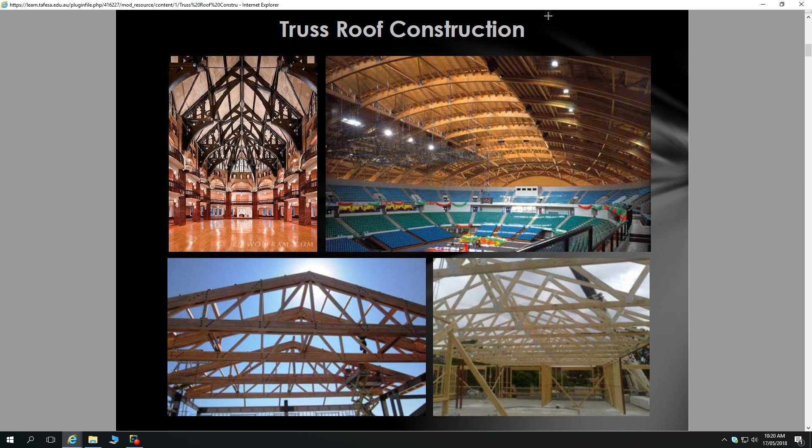Just a quick run through. With the evolution of timber framing, it starts out using simple timber members to span a distance. And timber has its limitations - the timber we can buy from the supplier can only be 6 metres long. That's the cut-off point for timber manufacturers, dictated partly by the size of trees and what can easily be handled. But even if we select trees ourselves and chop them down, there are still limitations in those sizes. One way we get by those limitations is by employing conventional timber pitched roof framing methods, and also by producing trusses.

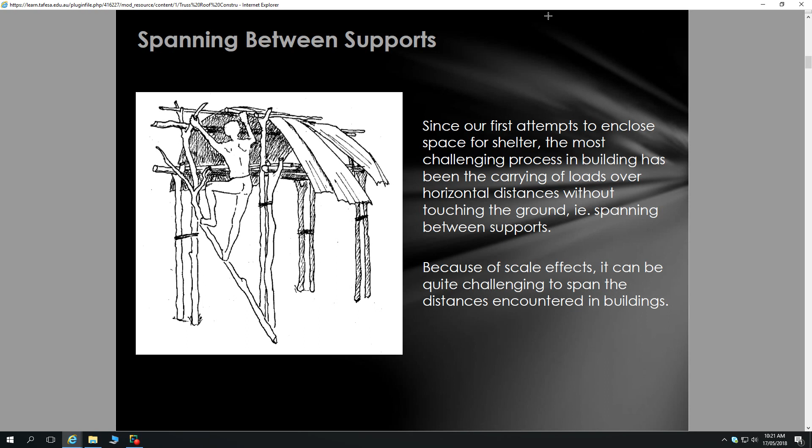So a very traditional approach is to use that skillion roof, and this is something which is still - what is old is new again - that process, or that aesthetic, of having skillion roofs.

Does anybody know Troppo Architects? A couple of nods, yeah. I guess they're known for their skillion roofs. They were a pair of architects that started up in Darwin and did a bunch of projects there, then opened an office back here in Adelaide about 10 years ago, bringing down some of those ideas from Darwin - really lightweight framing or lightweight appearance of buildings with skillion roofs, and also something called twisty roofs, which is basically a skillion roof with a twist in it.

That's just rafters that are graduated on a slope, and then the steel sheeting in front of that. This skillion type roof is one of the simplest forms of roofs we can do.

We have very simple elements: our rafters and then our purlins on top of our rafters, spanning from point of support to point of support. That has its limitations using natural timber, in that we can only get certain lengths of natural timber. If we have a log, probably this bit of revision from last week, we can only get one really big piece of timber out of our log. The rest of the log has to be smaller bits of timber. So we're restricted to getting those really large bits of timber that will span from one point to another point.

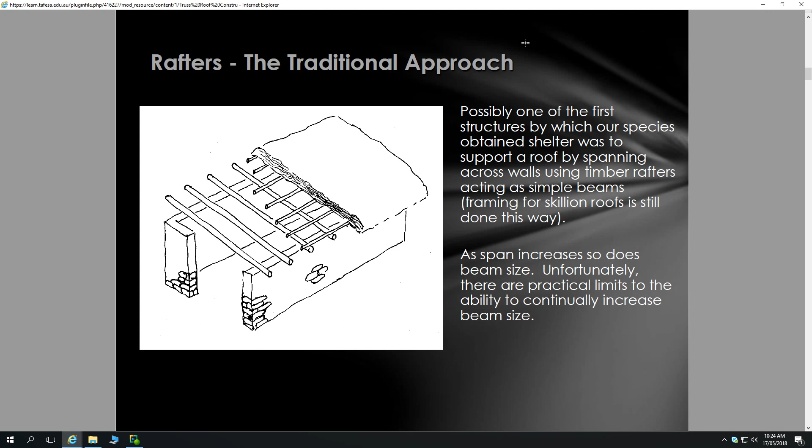Back to our trussed roofs. They're designed to span between external walls, factory made, and have to be installed in accordance with the Australian standard 4440. That standard sets out predominantly how an installer of the trusses has to go about putting them up. The reason we need to know that standard as designers is that it also gives some limitations as to what we can do, and also sets out the types of things we need to be looking for on site. We won't get too heavily into that today, but I suggest you look at it in your own time - Australian Standard 4440.

Trusses can be designed for most roof shapes, but are preferred for simple designs, rectangular with gable ends. I think everybody here knows what a gable end is as opposed to a hip end now. Gable end means we'll have that triangular shape right at the end of our roof, so if we were to produce a rectangular building with a triangular shape at the end.

That is incredibly simple for trusses. We have all the same trusses all the way through, except for the last two on either end, which are slightly shorter than the others, and we have outriggers which go underneath our purlins that go out to form that gable end. I think we've got a mock-up of a building in there I can bring in to show you how that gable end is formed.

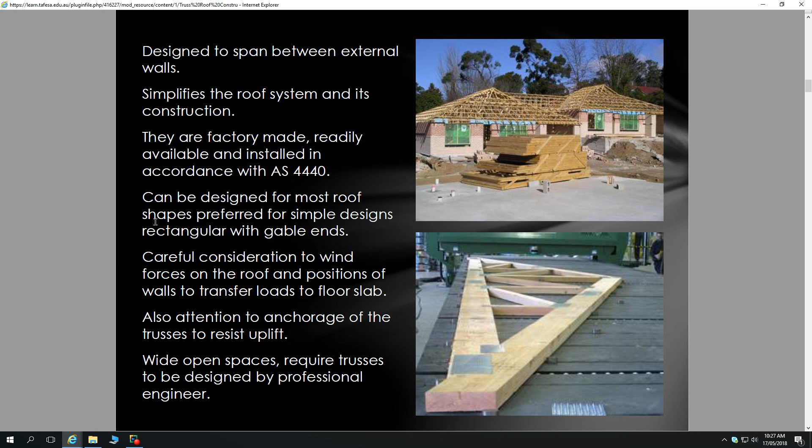Incredibly quick and simple form of construction. Gets a little bit more difficult when it comes to hip ends. I'll get into hip ends a little bit later.

As I said before, very lightweight construction, large clear spans, open web construction makes for easy installation of services. With our conventionally pitched roof here, we have a lot going on. Yes, there's plenty of open spaces there, and for running air conditioning ducts, etc., we'll find ways to get those in there, but there is a lot going on.

The thing about our timber trusses is we have very large open spaces, and those open spaces are all going to be in line with each other because the trusses are going to be all the same, except for when we get to our hip ends. That makes it incredibly easy for designing services. We can go, all right, we're going to put an air conditioner here on the roof, and then run our duct all the way along. Makes it incredibly simple. A conventionally pitched timber roof is not as simple for that, we have to do a bit more working around. So incredibly quick to put up, there's that versatility of design.

Can someone design a truss to have an attic inside it? Pretty much, no, but you can design trusses with large enough open sections. For example, if we wanted an attic in a truss roof, we could do a form of truss like this, and we'd probably have to do some webbing in there as well, straight up to there. So we'd have to form up trusses that are like this. I'm not a truss manufacturer myself, but that's what we would have to do to get an attic in there.

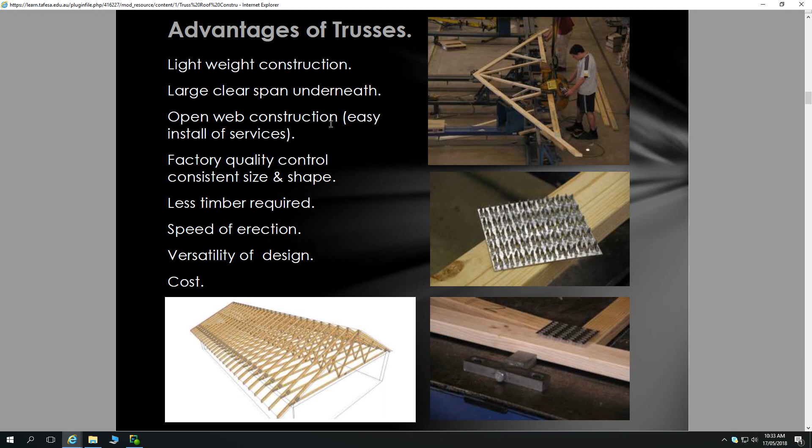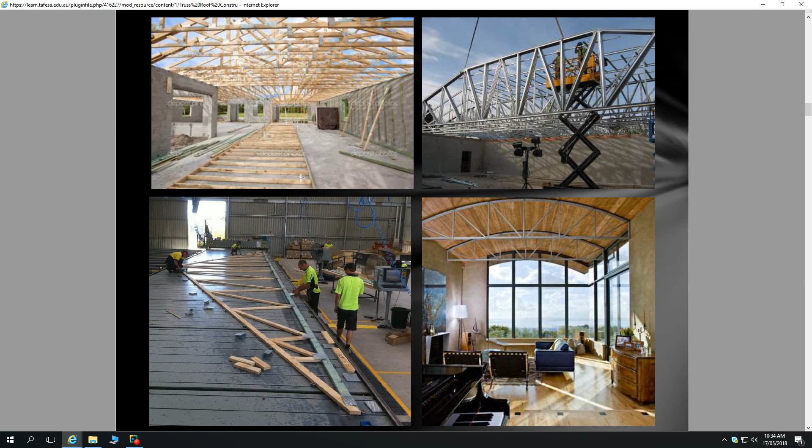So a whole bunch of different types of trusses. Anybody want to have a guess at how long that truss is? I don't know myself, but I can guess - more than 15 meters? It's probably not going to be more than 15 metres. I reckon 15 metres is about our cut-off for being able to be transported on a semi-trailer.

I guess if somebody was laying down on that bed, that'd be about 1.8 long each of those sections - we've got 1, 2, 3, 4, 5. Can't count them, but it would be probably about 13, 14 metres long, that truss.

That is a very large open space to create, and that's the fantastic thing about trusses - they're just using pieces of 90 by 35 timber, so not very large pieces of timber. Look at our timber log, we get lots of 90 by 35s out of that log. So plenty of that timber available, but we can create very large spaces using those trusses.

Other interesting things shown in these pictures. This one at the top, it's not that clear and evident, but there's something interesting happening with our bottom chords - those trusses have a stepped bottom chord to create a two-staged bulkhead. Now, why the designer or the architect has decided on a two-staged bulkhead, I don't know, but that goes to show that such a feature is also possible with trusses. You can certainly achieve that with conventionally pitched timber framing as well, just not as simple and not integrated into that one unit.

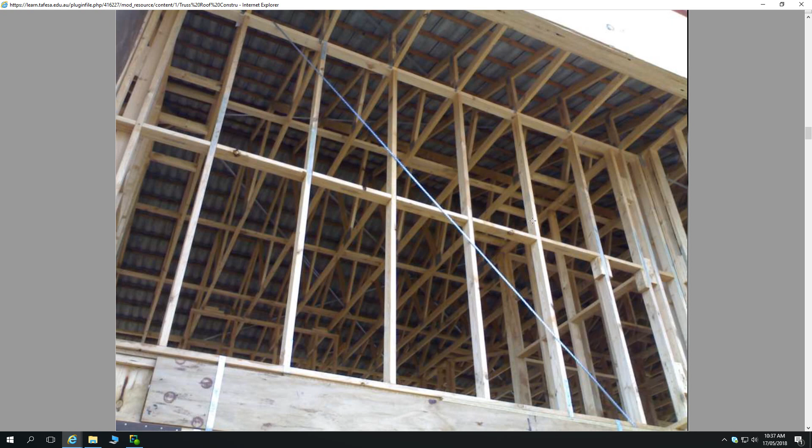There we have some trusses that are called cantilever trusses. So what we can see right at the top of this picture is that the trusses, their ends don't mount on the timber frame - they're actually mounting partway through the truss, let's say 900 millimeters into the truss. And to achieve that cantilever, those trusses have been designed with a vertical web straight up from that to transfer those compression loads from the roof straight through that web onto that wall frame.

So we have this end section of the truss working in its own system - we've basically got a triangle there to be able to cantilever out and take all the load of those tiles. Triangles, very strong shape. We've got that triangle there, and then our truss back through there that's also working all as a single unit.

So cantilever truss, that differs from a sailover truss. A sailover truss is where we've got our top chord that hits our top plate of our wall framing and then sails over to create a raked eave. So our cantilever truss creates what's called a boxed eave, this one creates a raked eave. However, we can go along and add some timbers into here to box the eave if we wish.

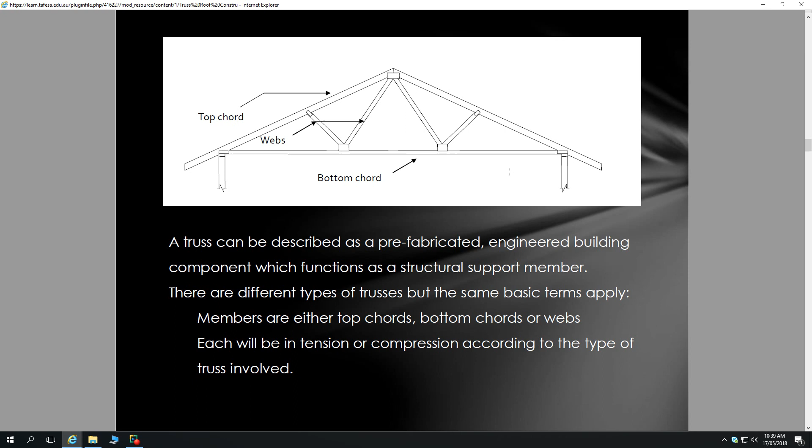So a bit of truss terminology - top chord, which are our rafter sections, bottom chord, which make up our ceiling joist sections, and webs that tie those two together to make them work together as a system. We'll go through that fairly quickly, we do have a lot to cover, so here we go. Now, I said I'd talk about hip ends.

So with trusses, if you understand our standard truss, our typical A-type truss with a W-shaped web, and understand how we form up a hip end with trusses, and then understand what's called saddle trusses - if we know all of those, we can look at probably 98% of trussed roofs and know how every single member within that trussed roof works. That's what we're going to try to achieve now, is to understand hip ends, and then I'll show you some saddle trusses. Understanding that, you can look at far more complex roofs but break them down into these simple elements.

So with our hip end, that's what we've got here on our example roof. Rather than a gable end, which has triangles with the ridge carried all the way out, we've got hip ends, which are sloping ends to it. Very standard form of roof. As you're driving home, have a look and see what roofs are hip ends, what are gable ends, and you'll also see some roofs with Dutch gables as well - that's where you've got a ridge which carries out part way, and you've got a small triangle at the top.

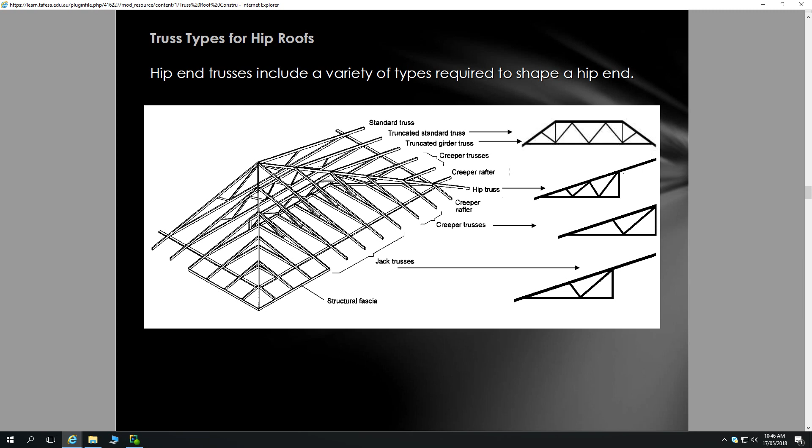So we'll go through this fairly quickly. Explore this to the extent of your own interest, basically.

King post trusses, you'll see those in some very old buildings about the place, old warehouses and things like that, where we have really big pieces of timber back in the days when people were chopping down really big trees, and there was plenty of big timber around. Queen post truss is a little more economical with use of timber because we start introducing more webs.

These king post trusses can only span up to around 5 metres or so. Queen post do up to about 6 metres.

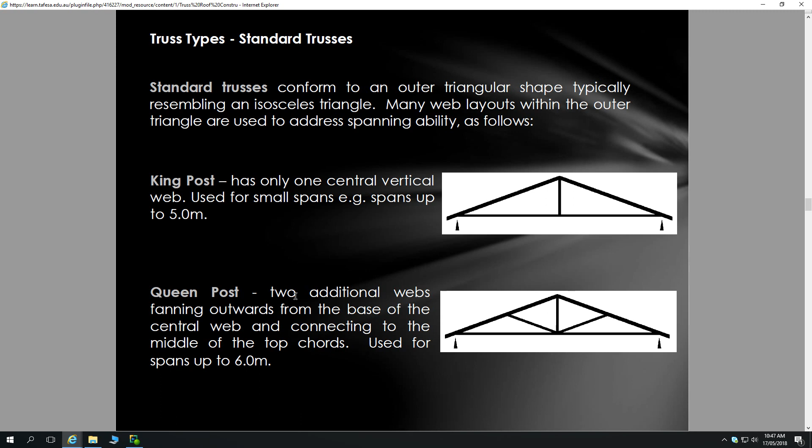So the A-type truss, that's got your W for the web. That's your most common, and they're the ones you'll see in the vast majority of residential builds, spanning up to about 9 metres. So typically we're not interested in spans longer than that in a lot of residential architecture.

However, if we're creating some very large open spaces, we can go to things like our B-type trusses, which have 2 Ws - W on this side, W on that side for our web. So A-type's got the 1 W in there, B-type is W and W. They'll span up to about 14 metres.

So a standard girder can be based on any of these previous types, but is designed to be stronger to support other trusses. We pretty much stop at that generally for residential architecture, for two reasons. People don't tend to build houses with spaces larger than 14 metres in an open section, or a house typically doesn't exceed 14 metres in width.

As a rule of thumb, a lot of councils will allow, when you go carving up allotments, 13 metres frontage to the road. So 13 metre width of blocks, which is fairly typical residential block size now. Older blocks are much larger than that, but 13 metres width. So when we're talking about 14 metre spans of trusses, we're talking about fairly large buildings.

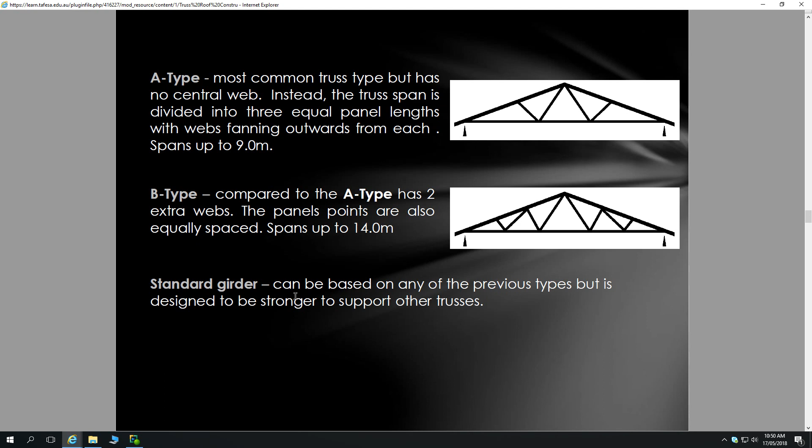And also with very large trusses, you have to think about how you're going to manoeuvre that on site, how it gets about from the truck to the building. So truncated standard truss, and then truncated girder truss - the difference here is this line is thicker, so thicker bits of timber, that's it.

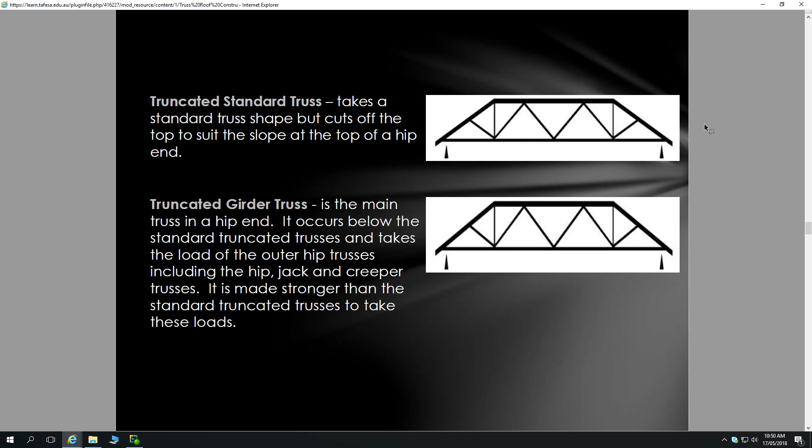Cantilever truss, that's what we saw in that other picture where our truss cantilevers out. A cut-off truss we might use where we've got a parapet wall happening at the front - a pitched roof, then a parapet wall right up front, for a shop front or something like that. Or we might use that in a maisonette example, where we've got two houses joined together by a common wall, or a garage wall. Typically where that terminates against some sort of wall, we'd use a cut-off truss.

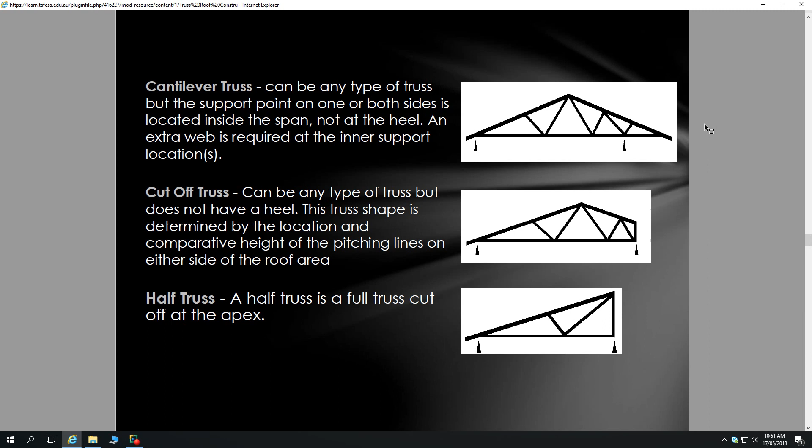And then half trusses - use those in a skillion roof, and use those half trusses in a hip end to form jack trusses, etc. So half trusses are used all through the place, in many scenarios.

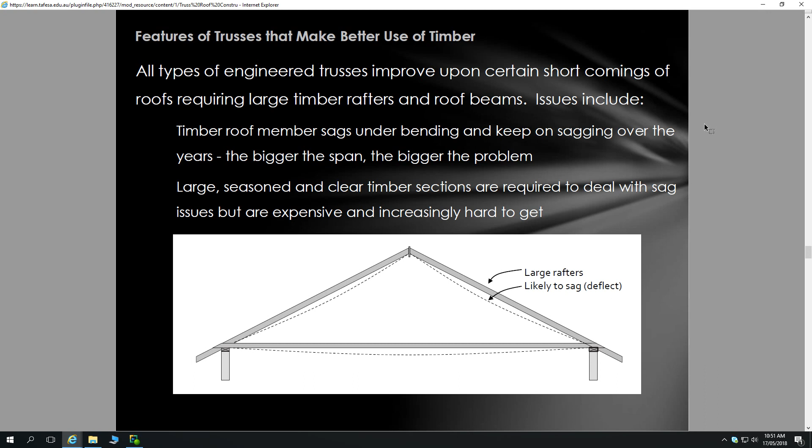So we'll go through this fairly quickly as well, because I think I summarised that fairly well with our truss at the beginning. So timbers want to sag.

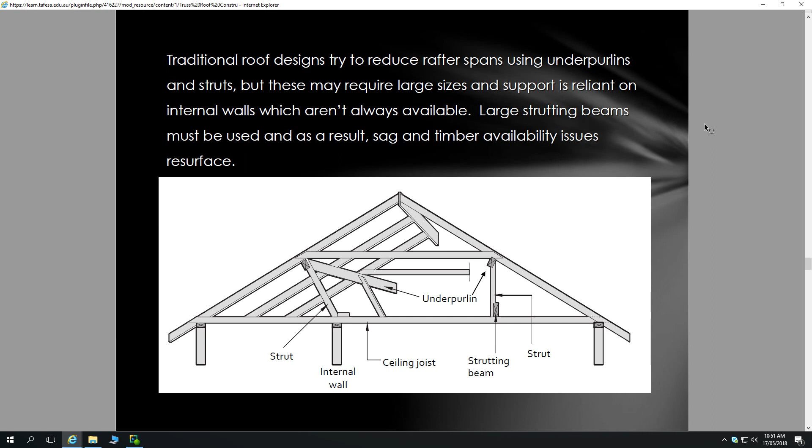So these slides are also organised around showing some of the conventional pitch timber framing in there as well. I'll cruise through that because we're going to cover that a little bit later.

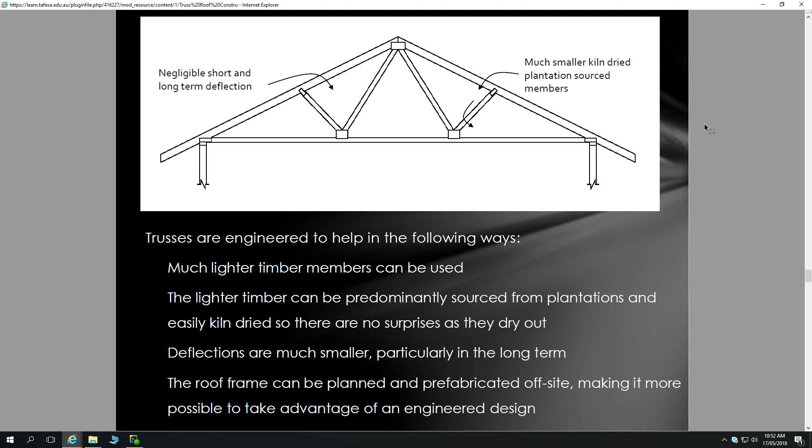Our webs transfer those stresses through other parts of the truss to make it all work together. Trusses can be designed with a slight upward camber. That means when we apply the construction weight to the building, it settles down to be nice and straight. That's preferable to designing a truss which is exactly straight, and then applying tiles, which are 90 kilograms per square metre, onto that roof and causing it to settle slightly with slight curves in it.

So is that the only instance where you do it, when you're doing tiling? Because surely with a sheet roof you don't get that settlement. Yeah, sheet roof without ceiling loads imposed, we're talking about 10 kilograms per square metre on those top chords, that's next to nothing. You're not going to get a piece of 90 by 45 bendy with that. So it's really only with tile roofs that you want it.

That's part of the information you have to supply to your truss manufacturer. You give them your floor plans, your roof outline, your elevations so they can see what those trusses will be in elevation, and you specify the roof type. For two reasons: one is that load, so they can design to counteract it, and the other is for wind loads.

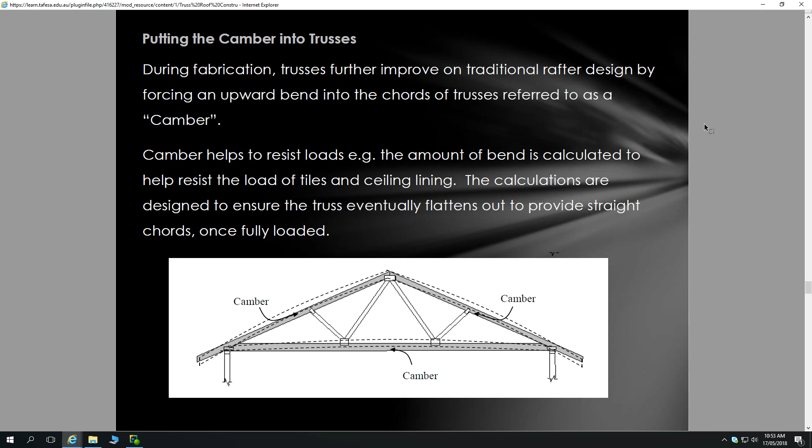Benefit trusses span long distances, as I covered earlier. Internal walls cause problems if used for support, because they change the way the truss works. The way we get around this is we want our internal walls fixed at the slab, but then also fixed at the top, because we don't want walls that just flap around and possibly fall over. So they need to be fixed to our trusses, but we need the trusses to work independently. We're only talking about very slight amounts of movement, millimetres if that, but they still need those millimetres to work.

The way we do that, I'll turn one of my nail plates into an L-shaped fixing. In our L-shaped fixings we have accommodations for nails which are long and skinny, so elongated holes, and the nail goes in there, but it's not shot fired, we don't use the nail gun for that, or we shouldn't. You just hammer it in and leave a small gap. That L plate goes through the bottom chord of our truss, and this is the top of our wall frame here, fixed there like that. So that truss can move up and down ever so slightly, but that wall is still fixed in place, so it can't topple over in either direction. That's how we achieve it.

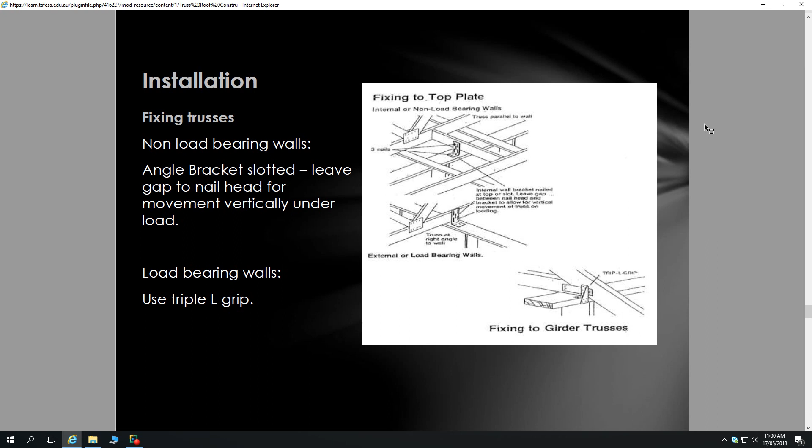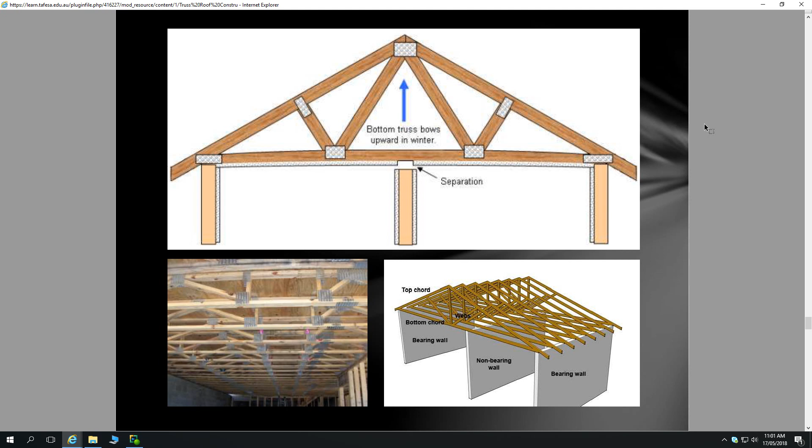So we've got our roof trusses. We also have trusses for floors as well. To be able to get floors in an upper story to span large distances, create those kitchen and family areas that are 12 by 12, that's how we do that with floor trusses. So more for your own interest, a whole series of trusses here.

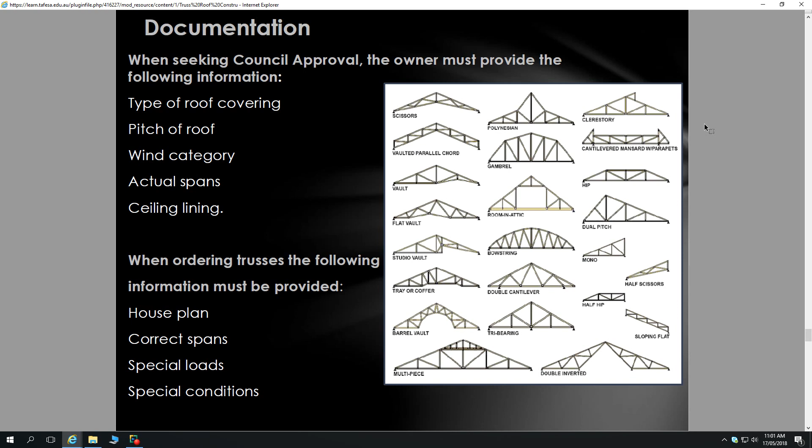And this is our standard gable end, so just a whole series of triangles through. Although what we don't have happening in this example, unfortunately, are those outriggers that I spoke about. Someone's done just a very simplified version of that.

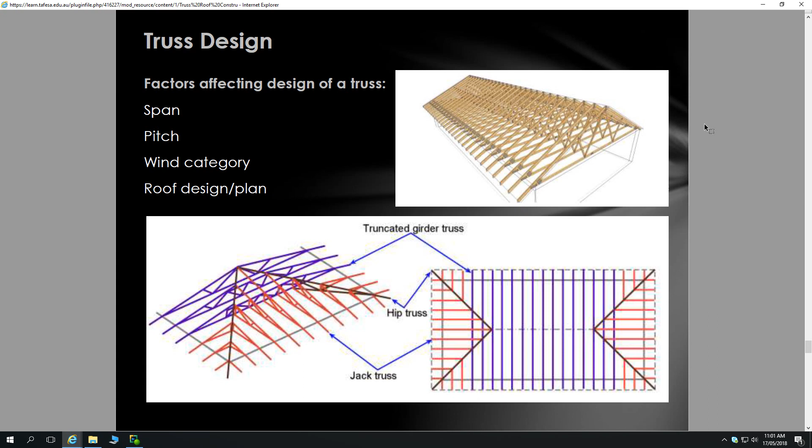And then our girder truss layout. Once again, something that looks a little bit complex, but is actually really very simple when we break it down into what we know now about hip ends and standard trusses. So there's a whole series of standard trusses in here, it's a bunch of hips, etc.

What we are yet to cover are what are called saddle trusses. Saddle trusses are these tiny little trusses that mount on top of an existing truss roof. So we set all these major trusses in first, for our major ridge, and then we form up the hip end, and then mount all these small trusses on top of that existing truss roof to carry that pitch of that section through. So saddle trusses are just trusses that sit on top of other trusses, basically.

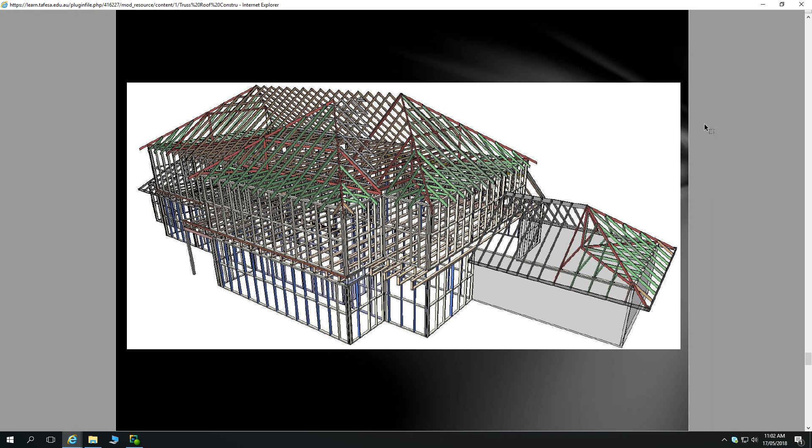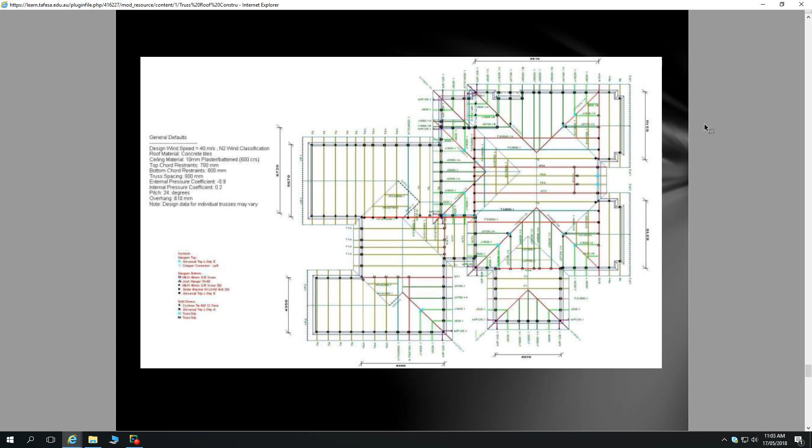So there is a truss layout, which to the untrained eye can appear a little bit confusing, and unfortunately it's not really clear enough to read thoroughly. But all these little letters and numbers here simply represent what type of truss it is, like a little bit more of a complex IKEA diagram. So saying T1 goes here, T2 goes there, or these ones are all T1, and these ones are all T3, and this one's GT3, etc. It's exactly the same principle.

And once again, some seemingly complex floor plans and truss layouts, but when we break it down into individual sections, we can understand that fairly well. So we have half of a hip end here, we've got a hip end truss with some creeper trusses on that, and then some girder trusses that come through to this major girder truss there that carry that, and so we have a cut-off truss in there. This blue one, we've got a cut-off truss there, or that red one's also a cut-off girder truss.

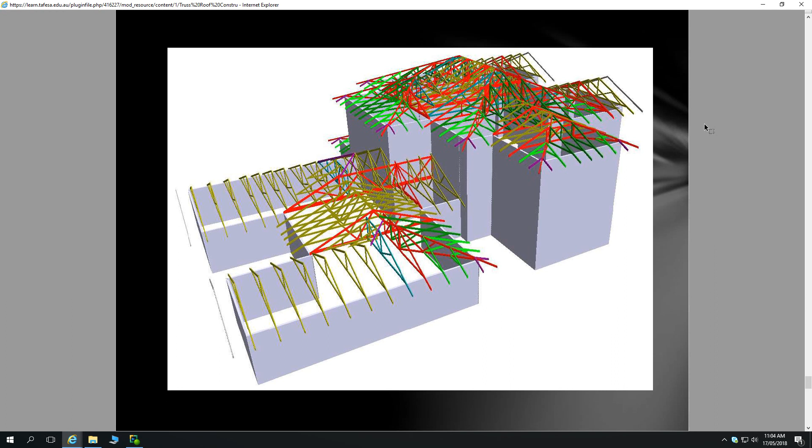A much clearer truss diagram. So here we've got all our J1 through to J5, our jack trusses, mirrored exactly on this other side. That J1 is going to be exactly the same as that J1, if the carpenters get their walls square, which we assume they're going to. So all of those trusses are going to be mirrored of each other, because that roof is the exact mirror of itself, and so these are all fairly standard.

We've got all these S's - S1, S2, S3, S4, S5. Anybody know what those S's are for? Saddle. Yep, saddle trusses. So they're sitting on top of our major roof there.

And then all these just the T, that's just for your standard truss. So that's truss 1, truss 2 - well, they're all truss 1s because they're all going to be exactly the same. These ones, the top chords are cut off because otherwise they would interfere with the ceiling plane once they're inside, so they're truss 2s. And then we've got TG2, so that's truncated girder truss number 2.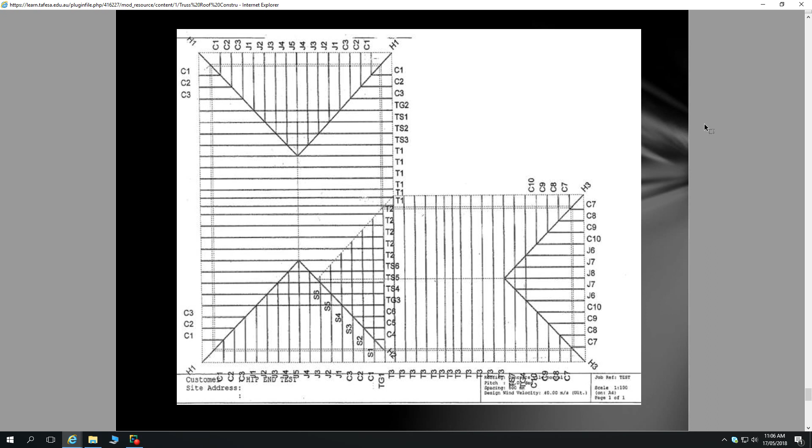And that's it. So your manufacturer of your trusses will actually do all of this? You don't have to do this yourself? You don't have to do that yourself, no.

You can do that yourself as an indicative design type thing. You're working through the design, thinking okay, this is going to be possible, etc. I've done it myself a bunch of times, but I know I'll mock it up to see what's going to happen, and then send it off to the truss manufacturer, and they'll work out a better or more efficient way. Typically you can get away with just producing your elevations and your roof plan, specifying any loads, point loads, solar panels, air conditioners, all that sort of stuff they want to know about, and then roof type, and then they'll do the rest for you. Which is great because then any liability is straight onto them. If there's any failure and it's all been done as they said, that's straight onto them.

So that's our truss roof. Now, in the other corner, we've got pitched roof framing. By and large, if we were to go like a battle of the technologies, pitched roof framing is suffering, but it's still very applicable, particularly if you're going to be working in any retrofitting scenario, and that is actually a very big area for building designers and drafters, etc., working with buildings that already exist - additions, modifications, rectification work. There's actually a lot of that work in that.

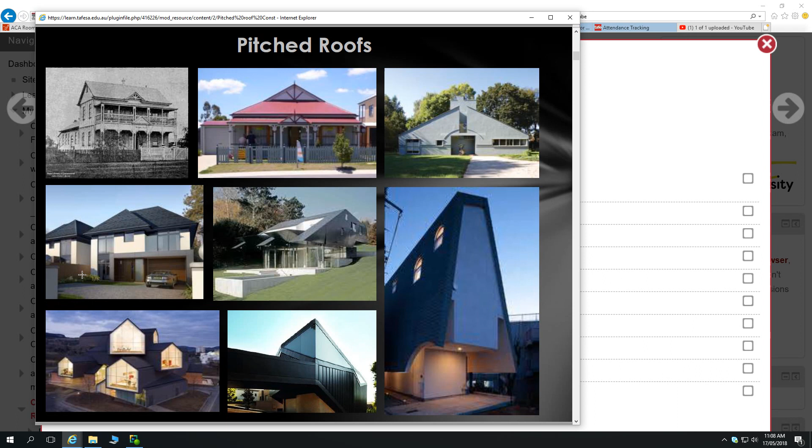So our traditional way of producing roofs is about using rafters and then finding out how we can support those rafters so the rafters are not huge. What you may also see in many instances is like this building here - we have this back section, which is all trusses. That really simple section was done all in trusses. But then we've got something funky happening up this end here - some sort of feature, looks like a Tudor style house with a very high pitch and an exposed gable at the end. So to create that Tudor roof, the designer decided it's going to be much simpler just to pitch that section in timber. And you get those amalgamations of approaches as well within one single roof.

Roof coverings. We've got to know what's going to go on our roof. The two major competitors are tiles and sheet roofing. We could spend all day talking about different shapes, types, and materials of tiles. Basically, you've got terracotta tiles and cement tiles, and they come in various different shapes.

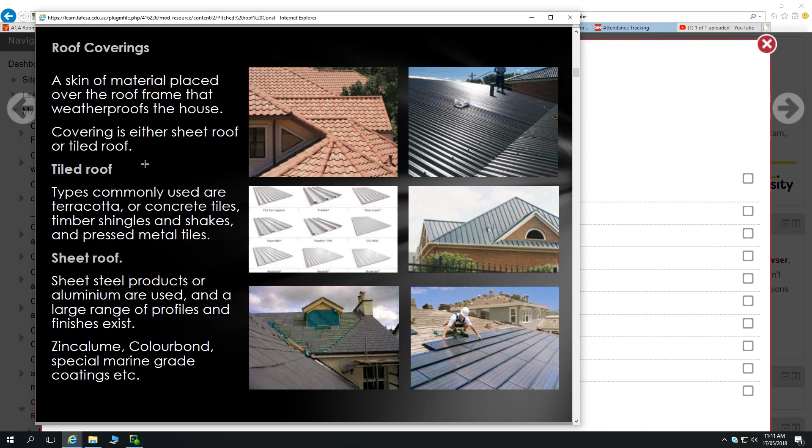The different shape it gets bent into dictates how far that piece of steel can span, because these ribs give it strength. If it was just flat steel, attached to our rafters, and I go to walk on it, it will just bend straight away. That doesn't have any structure to it. Those ribs are what gives the sheeting its structure. So by and large, our most common is this corrugated sheeting, called Custom Orb. So there are two major types of roof covering.

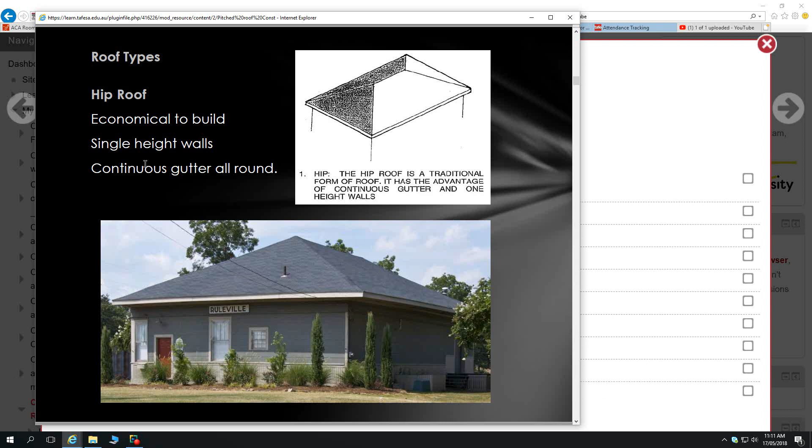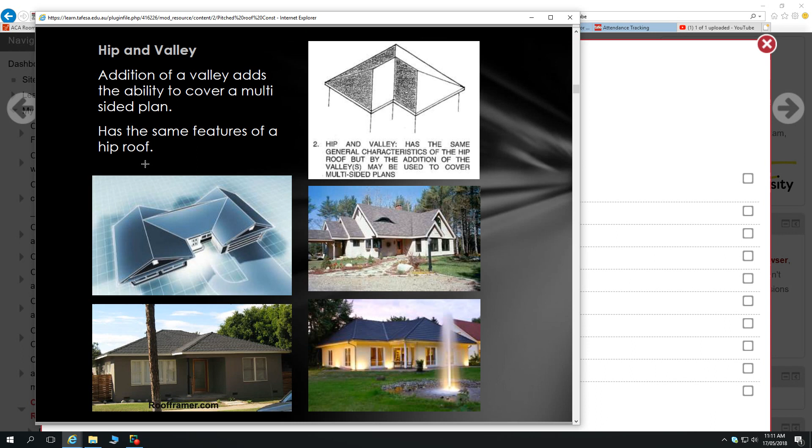Let's go through this fairly quickly. We know our hip roof, our hip and valley. The difference is, for our plain hip roof, it has to be over a rectangular building - we can't have any re-entrant corners. For a hip and valley, that's where we get two rectangles intersecting, and this area here is called a re-entrant corner. Where we have a re-entrant corner, we have a valley. So that's our hip and valley.

Sometimes we have a large rectangle for our floor plan and then a small rectangle intersecting. When we have a scenario like that, it's a broken hip and valley - that's where we have a major hip and major ridge, and a minor hip and minor ridge. Major is the big one, minor is small.

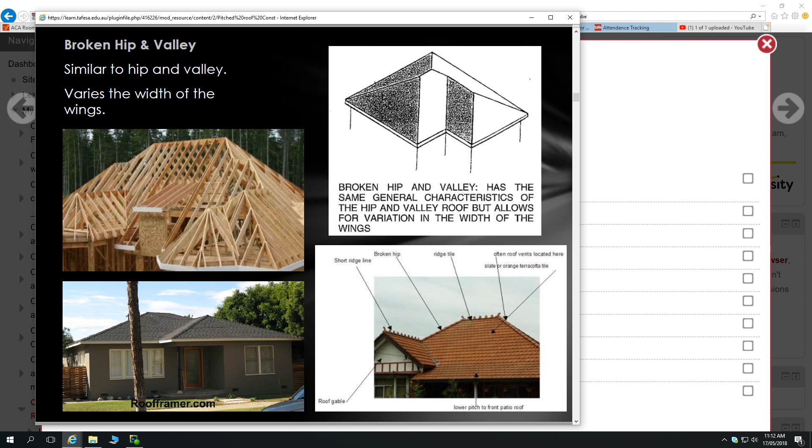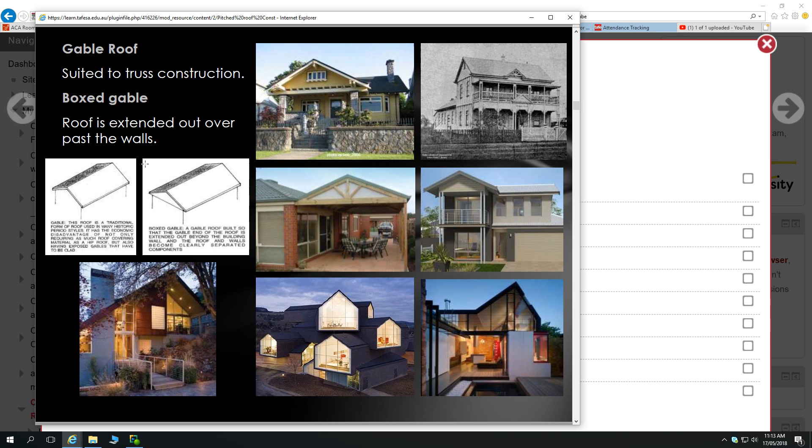Gable roofs we already know, so that's the triangular end - be it the gable on the front of a bungalow, or the gable roof of a federation style building with the Dutch gable. There's also an incredibly modern use of gable - very simple, minimalist rectilineal forms without ornamentation, without gutters, etc., keeping that as simple as possible. That's a very current approach you'll see in international architecture a lot - just that very simple silhouette house shape used in a minimal sense, and various other examples there.

So Dutch gable or gambrel - in South Australia we just pretty much call them Dutch gables. Within this building here, we can see at the front, that's our standard approach in residential architecture with the Dutch gable - it's used as a feature and fully enclosed.

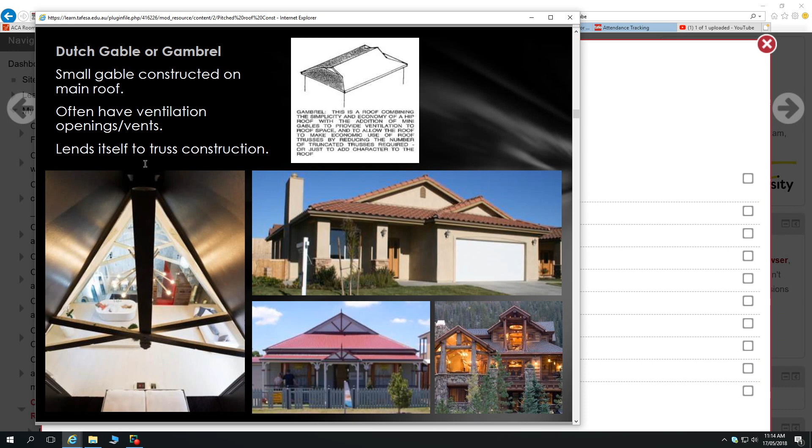The history of the Dutch gable comes from South Africa. Dutch living there built roofs and included these gables, open at the ends, to enable air to go inside that roof and pull the warm air out. You had both the slight breeze entering and the venturi action of that breeze as it passes over the roof to suck the warm air out and keep houses cool without air conditioning. That purpose has kind of been lost in many buildings and not really understood, but the feature has stayed - so that's the practical roots of what is now just an architectural feature.

And skillion roof - I spoke earlier of troppo designs, and this one right in the centre kind of looks pretty troppo design to me. But that's also very modern, though not so minimal. The aesthetic there is built around, I guess, typically Australian vernacular - the type of materials you would see used in older rural buildings, such as corrugated galvanised sheeting and exposed hardwoods, etc.

The skillion roof is used extensively in the inner suburbs like Parkside, Unley, North Adelaide, in those earlier built areas with simple symmetrical cottages - a hallway straight down the middle, rooms off either side. You can almost guarantee if you lived in one of those houses, you would have had a skillion extension on the back. So you've got those standard symmetrical cottages built around 1905, then a 1930s extension with a skillion roof, then a 1960s or 70s extension with an even lower skillion roof. It was also used for very cheap extensions.

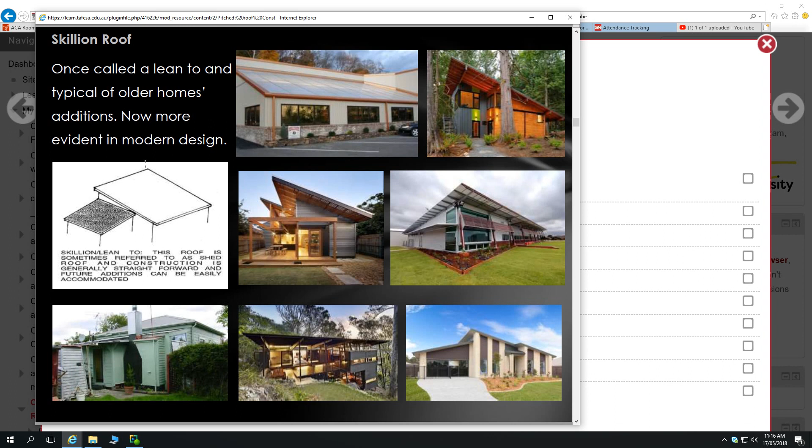Another fantastic type of roof, bound up in the 1980s aesthetic, but I very much like them for their function. It's the clerestory roof, where we've got two skillion roofs intersecting with a load-bearing spine wall through the centre. The function is twofold. That spine wall through the centre is limiting, being load-bearing - it has to sit through the spine of the building, you can't move it around. But the benefit is that you can utilise masonry for that spine wall, getting thermal mass right inside the building.

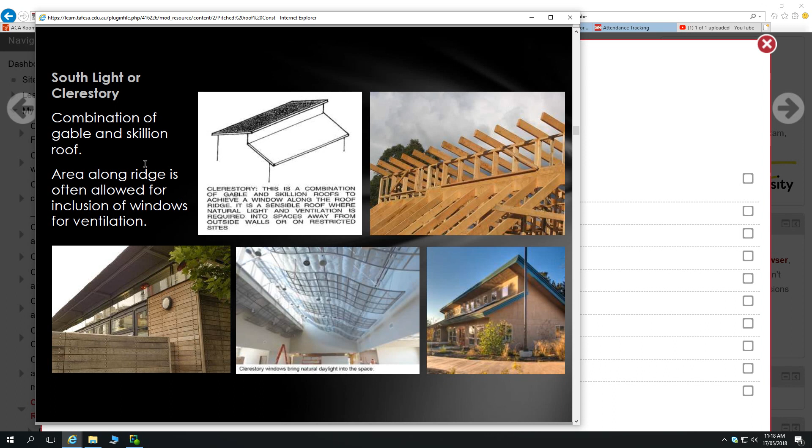That provides a thermal flywheel inside the building. Also, if this side is the north-facing side, in wintertime you can get light directly into the back rooms, illuminating the back of the building and the front area well with natural light. Then in summertime when the sun is overhead, both the back room and front room are shaded. So it's very functional for making a comfortable home with minimal energy inputs - a favourite with environmentally friendly building designers, though it's a bit bound up with that 1980s aesthetic, which can be unpopular for some.

Also, flat roofs - very few roofs are actually flat, and they shouldn't be, because we get water on top and we want that water to go somewhere. When we talk about flat roofs, we're talking about roofs with minimal pitch, like 1 or 2 degrees - just a very slight pitch.

If you're designing a roof with only 1 degree pitch, you want to be very exacting in your details for the builder - no tolerance in the height of purlins etc. Because 1 degree pitch is really very little, and we don't want water pooling on the roof. Two reasons: it may leak from that pooling, or it gathers dust, forms mud, and that's where your roof will rust out. Also with only 1 degree pitch, we've got issues with roof penetrations - moisture around those, and how we'll do the flashing.

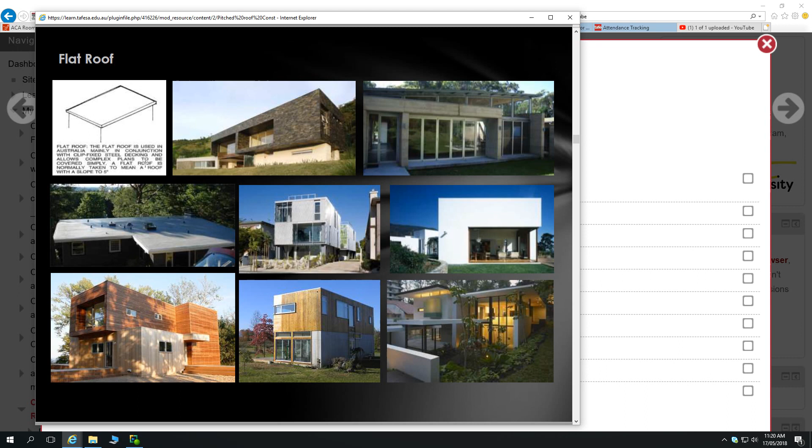Higher risk, but flat roofs do enable scenarios like this - very interesting rectilinear forms in their simplicity, which provide a blank canvas for some amazing materials. I like that design approach with really simple design but fantastic materials to showcase. Flat roofs enable that because you end up getting real simplicity of design.

A bit more Australian vernacular is the bellcast roof - the homestead style, where you've got a steep pitch roof for the main body of the house, and a slightly lower pitched roof for the veranda. This one here, right hand side, right in the middle, that's your typical bush homestead. And there's a very good practical reason behind it.

The really high pitch creates a lot of volume in the ceiling space, enabling hot air to rise away from the ceiling plane and aggregate right at the top of the roof, getting heat away from the ceilings. In the hot Australian summers, people who moved over from England didn't like that heat, so they wanted it as far away from the ceilings as possible. But if you carried that steep pitch down past the walls, very quickly you'd have roof in front of you, because with a steep pitch you can only have a skinny overhang before the roof gets in front of your windows - not a nice aesthetic, with that enclosed feel.

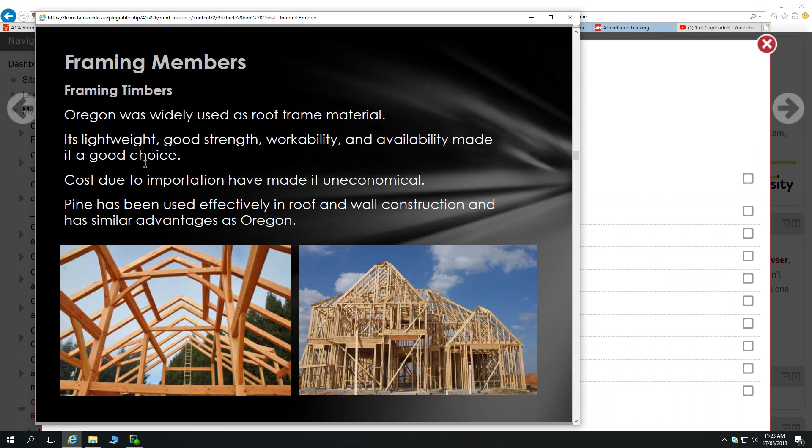With our roofs, I'll get our standard roof up here on this table in a sec. The idea with a standard or conventionally pitched roof is that you enable those - you don't want your rafters to be really big pieces of timber. Back to our log, we've only got very few very big pieces of timber within our log, so we don't want all the rafters in our roof to be really big pieces, because we're going to run out of timber otherwise.

So we want to minimise the size of the rafters, and 90 by 45 is a really good construction size. If we can keep rafters down to 90 by 45, that's fantastic - it's really cheap, typically around $2 a lineal metre, sometimes a little bit less for machine graded pine. That's got to be much cheaper than if we go to 3.50 or 3.80 or so a lineal metre for a 140 by 45. So because we have so many rafters, a lot of that timber in the roof, we save a lot of money by cutting the size down.

That is the main aim of this approach with conventional pitched timber framing. So I'll get our conventionally pitched timber frame roof up here and get you guys to come up and have a quick look at this and see how that works in practice. Okay?

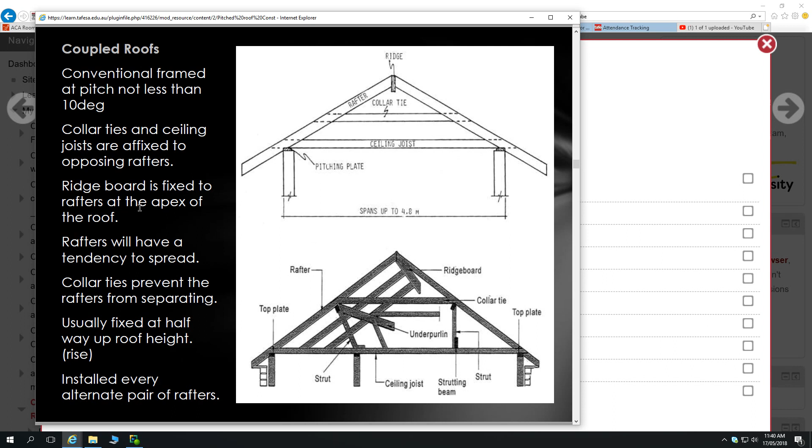So we've covered our timber members—a bit of revision there, and you'll get this revision going through that section of slides I showed you earlier on as well. We've got our ridge, our underpurlin, strut, collar tie, ceiling joist. Now here it's called a pitching plate. I guess that's not incorrect, but typically we call that a top plate.

So we've got our wall frames—the top piece of timber on our wall frames is the top plate. But pitching plate refers to any type of horizontal timber member which is carrying load. So we can have a pitching plate mounted on the side wall of a house to pitch a veranda off, for example.

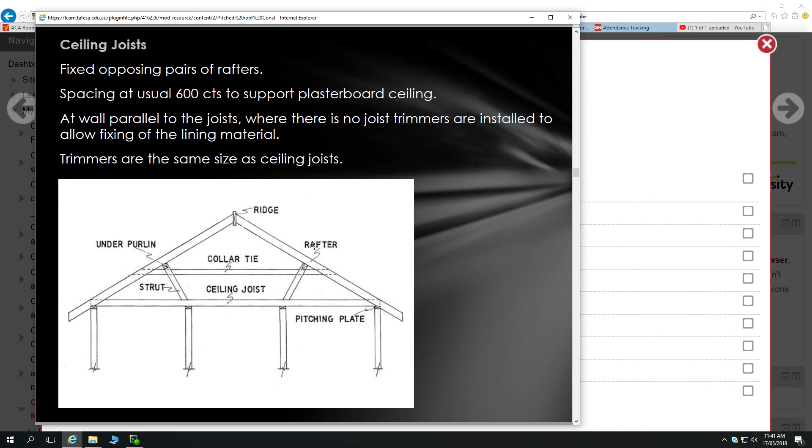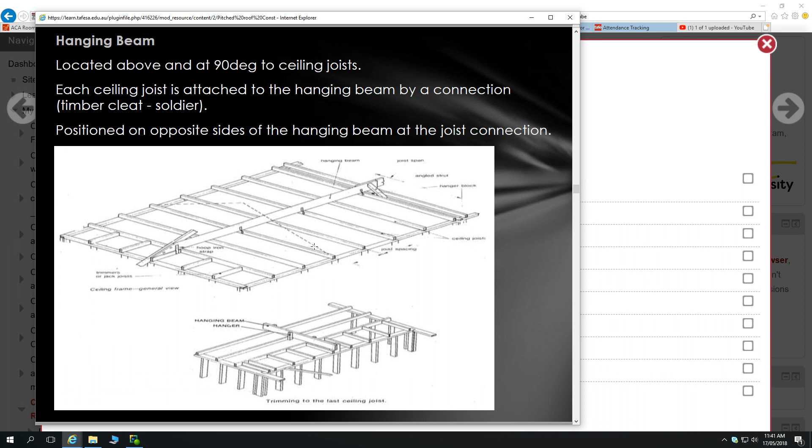Yeah, we'll keep moving on—not a great deal to show in that. So we spoke about our hanging beams. Our hanging beams split up the support of our ceiling joists. Once again, some more terminology.

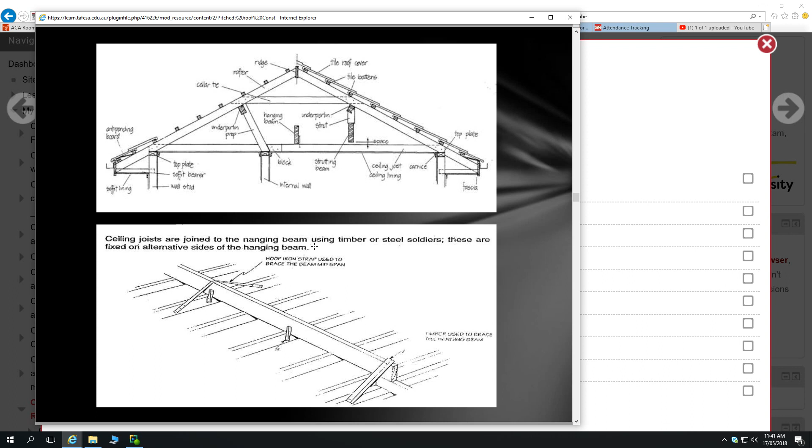That's probably going to be pretty hard to read from back there, isn't it? So once again—actually no, I won't keep going through today's lesson, but I ask that you go through that yourselves at home, and the timber framing quiz will be something like this as well for your quizzes at home. So that's our ceiling joists—we've got little hangers there.

The rafters, the incline members of the roof frame, are placed at 600 millimetres for tile roofs and 1200 millimetres for sheet roofing. 600 millimetres for tile roofs because tile roofs are much heavier, and we need short spans for our tile battens—the horizontal pieces of timber that our tiles sit on. Also, because tile battens carry a lot of weight, even though they're only making 600mm spans, we typically have to use hardwoods for that as well. Hardwood is a much stronger piece of timber, so we can use smaller sections—typically 50 by 38 hardwood will span that distance.

Rafters are cut at the intersection of the top plate to seat the rafter, and it's called a bird's mouth. This is our top plate, the top of our wall frames. To ensure our rafters aren't inclined to just slip off the top of the wall frames, they're actually seated in. So when we design those rafters, we design them for approximately 50mm plumb cut, and then whatever resulting seat cut from the angle of the rafters.

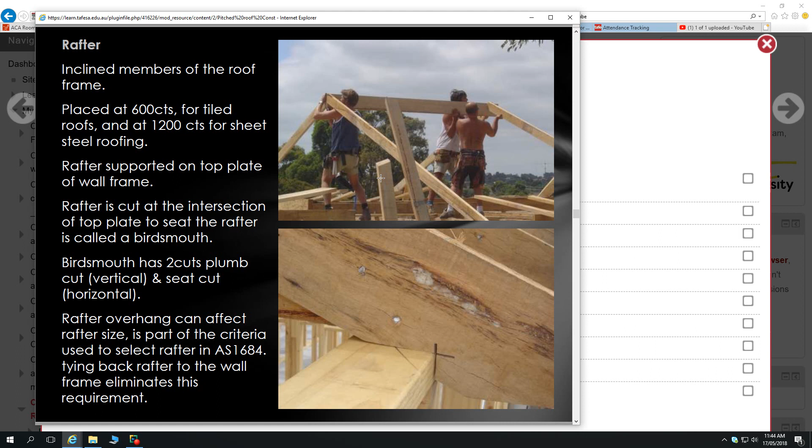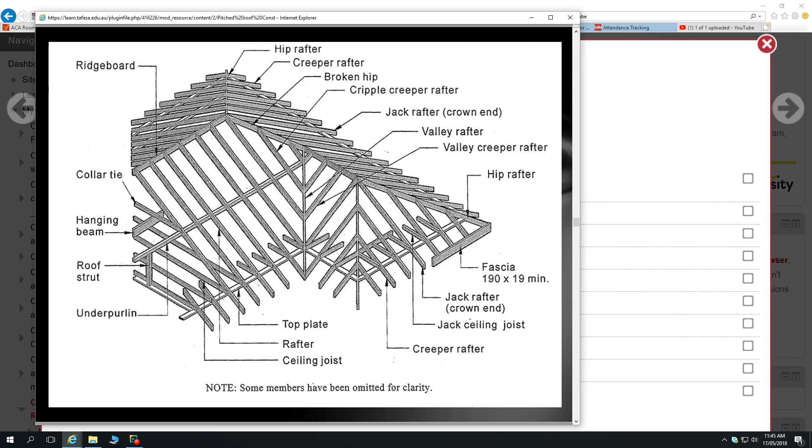Yeah, spot on. You're going to have to accommodate a gutter in there, and that gutter is going to have to be supported in some way. So what you have happening on top of your rafters there are some boards that will carry a very thin sheet gutter. We've got thin metal sheet which forms a V gutter, and that is supported on timber boards that go straight down our valley. Here we have it, so we have valley boards sitting on that.

Another way to do very large spans of rafters without intermediate supports is to use engineered timber. That does away with a whole lot of work on site, but for these engineered timbers you're going to be paying around $20 a linear metre, as opposed to about $2 a linear metre for 90 by 45 MGP10. So you're going to spend 10 times as much on your rafters, but you also then have no load-bearing sections within your rooms, and it's going to operate much like a trussed roof.

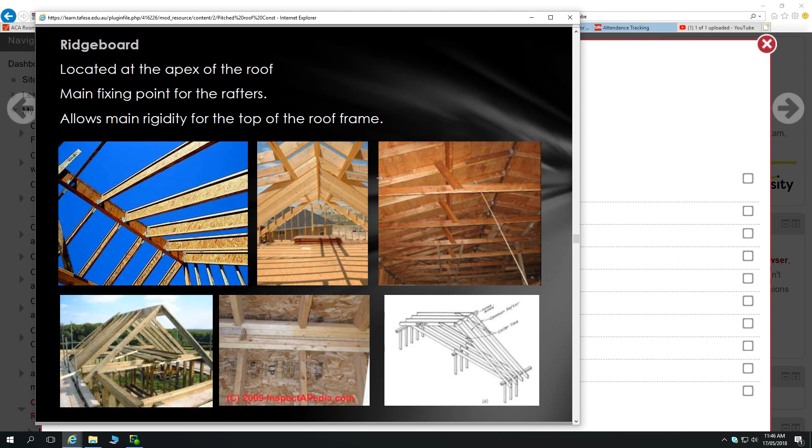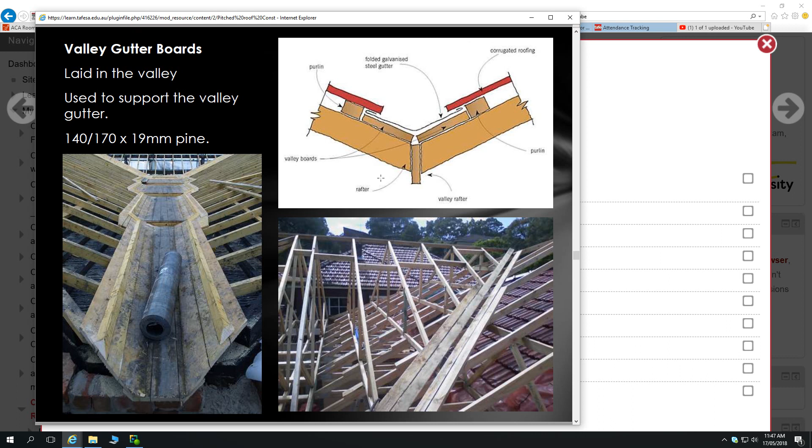This valley gutter is folded at the ends to ensure that any water that gets up there, or sitting high in that valley, is not going to be blown by the wind and get passed into our roof space. So we want that return on the top of our valley gutter as well to help catch any water that might be blown by wind.

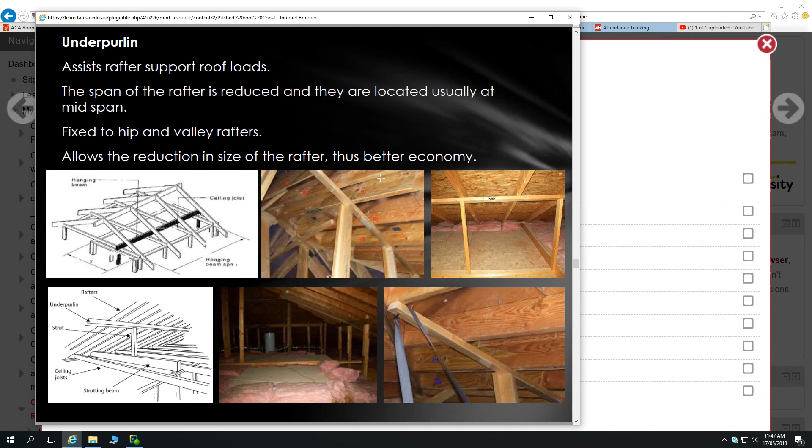Our underpurlins sit on top of our rafters, or underneath our rafters, and help the span of our rafters. They cut the span of our rafters typically by half.

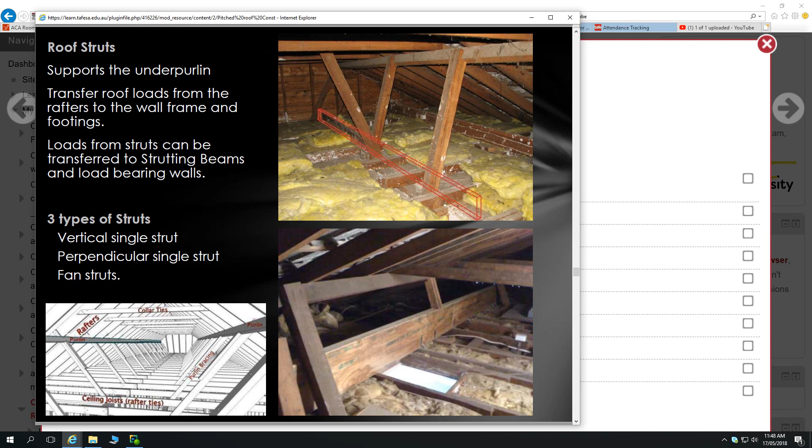Also, the invention of engineered timber, LVLs, etc., have made all of this much simpler as well.

I said earlier that you can size up all of these members in accordance with the timber framing code. You can also do it in association with both the timber framing code and design programs put out by timber suppliers. There's a timber supplier based in the southeast who cut a lot of the forest down there and produce a lot of the MGP10 for framing, but also many of the engineered beams. They're called Carter Holt Harvey, a very large company.

They produce a program called Design IT, which, if you calculate your roof load areas and put those details into their little program, you can download it for free. It doesn't take up a huge amount of space on your computer. Get that on there, because then you can punch in the numbers and it will design all of these beams for you. In fact, you can use it to design the whole roof.

Much of your rafter spans and things like that, if you know your way around the timber span tables, it's quicker to use those for simple stuff. But for more complex stuff where you've got multiple loads, particularly if you're doing strutting hanging beams that take a lot of load from the roof and also pick up ceiling loads, they're going to be large pieces of timber. Typically they're going to be much cheaper to do as an LVL, and you can size up those LVLs with that program as well.

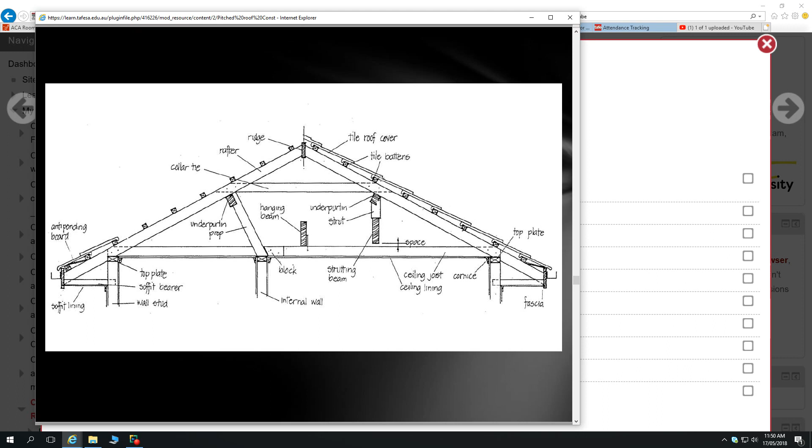I think it's probably not too far in the distant future that programs like that will be associated as patches with our drawing programs, be it Revit or CAD or something like that. You design a house frame and then you've got this program as a patch that goes, well, these are all the pieces of timber you need to design that. But for the interim, as designers, we still need to work through those various things and do those roof load calculations ourselves.

Perpendicular struts are these ones that go perpendicular to our rafters. We can also use vertical struts, so that's struts that are straight up and down. There is a little bit of overturning action that happens with a vertical strut because your roof loads are not always directly down. Because we've got our rafters on an angle and gravitational loads, it pushes slightly in as the rafters want to bow.

So there are limits to vertical struts, and perpendiculars are typically more preferable, but it always depends on where your load lands. That is all set out in the timber framing code as well, your parameters around the angles you're allowed to put your struts. So if you're going to be designing struts, have a look at the timber framing code to see what angle of strut you can use. Perpendicular struts are fixed at an angle not exceeding 35 degrees and perpendicular to the rafters.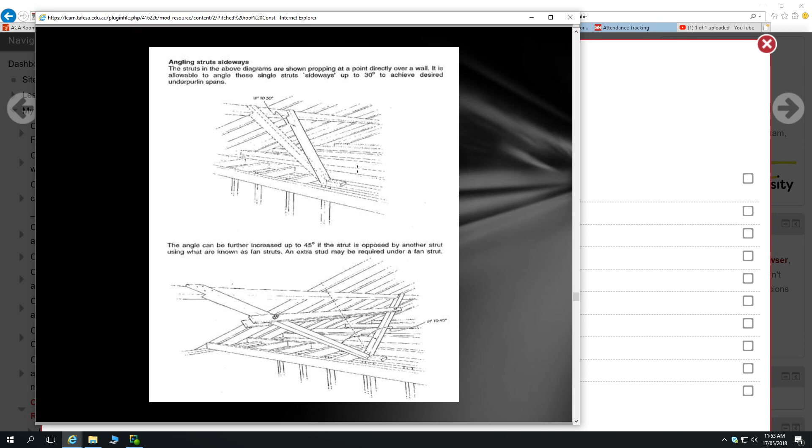Some retrofit options for if we're going to impose additional loads at a later date, be that a solar hot water service. A solar hot water service with its solar collector and then 100 litre storage on there is going to produce a pretty substantial point load. So if we've got a sheet roof designed for 10 kilograms per square metre, and then put 100 kilograms on that square metre, we're drastically changing the way that roof works and the loads on it.

Some ways of getting around that are by doing things like tie bolt trusses to increase the span of our underpurlins, or spread that load between different points. Once again, that scenario needs to be designed by an engineer. It's not the sort of thing you'd just want to whack in yourself, because if it fails, you're the one liable for having specified and or installed that tie bolt truss. So I don't suggest it.

Sorry, can I just ask, when people are installing solar panels and all sorts of things onto roofs these days, do they do these sorts of things? No.

It's a grey area, I don't really understand it. I installed solar panels for a while as well. I probably should have asked the guy who ran the company how they get around it, but I'm pretty sure they don't go through council, they don't go through the whole design process for additional loads on that roof. I don't know that it's become a major cause for concern, because solar panels are not super heavy, unlike solar hot water services, which are very heavy.

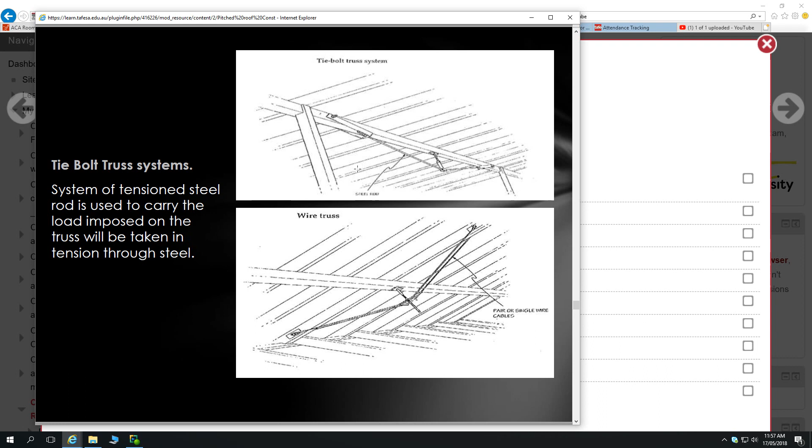So in the final three minutes, strutting beams. We determine the size of a strutting beam by the square metres of roof space that it supports. So our square meterage of roof space is determined at midpoint between the ridge and the underpurlin, and then once again midpoint of the underpurlin and our top plate, and then midpoint between our position of strut and midpoint between our other position of strut.

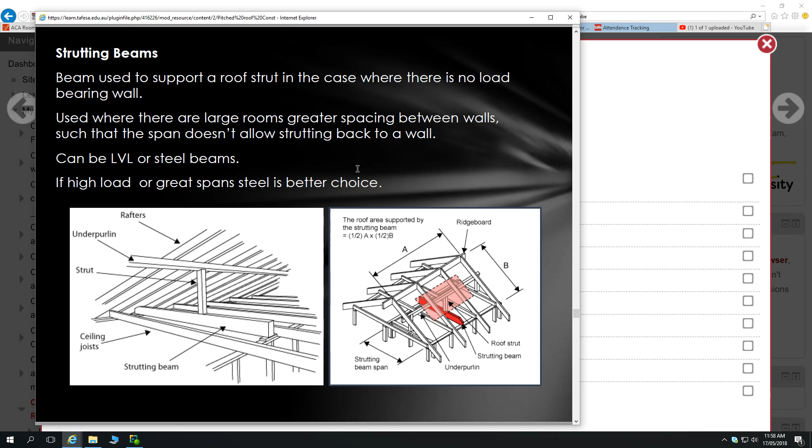So that strut is carrying that load of roof there. The other loads of roof are covered by our ridge, or our top plate, or by this strut or that strut. That's how we calculate it, that's how the timber framing code specifies it. We determine how much weight is on that strut, and when we know how much weight is on that strut, we go, okay, this is the span of our underpurlin - it needs to be this size to be able to achieve that span with that amount of weight on it.

Counter beams - that's something we didn't see in our example roof. They're used to support one end of a hanging beam or at midpoints of hanging beams. Counter beams may also be used to support hanging beams and struts - they are referred to as combined strutting counter beams. So we've got our hanging beam that goes across here and supports our joists, and then to help support that hanging beam we introduce another piece of timber called a counter beam.

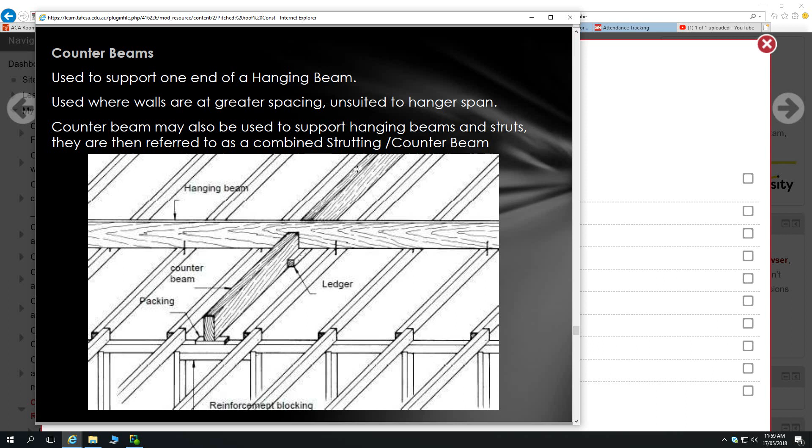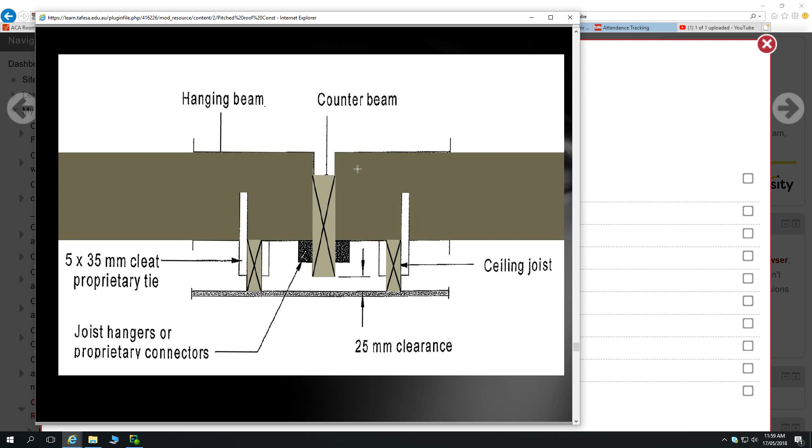That hanging beam can be supported by our counter beam using a detail like this, where we have our counter beam with two fixing blocks here, and the hanging beam sits on those fixing blocks and then is mounted into our counter beam there. We covered combined strutting hanging beams earlier.

Bracing - our roofs need to be braced against the racking forces of the wind. It should be designed in accordance with the timber framing code, and it's not the type of thing you end up designing straight out from TAFE. It's the sort of thing you'll design once you've got a good working knowledge of house frames and the timber framing code. In the engineering office it was expected that after time I would just be specifying or drawing in bracing for these particular frames, but it takes time to actually understand exactly how that bracing should go in and how it should be designed. The reason we want that underpinning knowledge is because bracing is the type of thing that stops the whole building going. We can have failures of certain sections of the building because of underspecified sizes of timber, but the bracing is what stops the building actually going one way or the other. It has a very important role.

It's typically steel strap fixed at locations, because steel is very good in tension. It stops that building moving sideways and twisting.

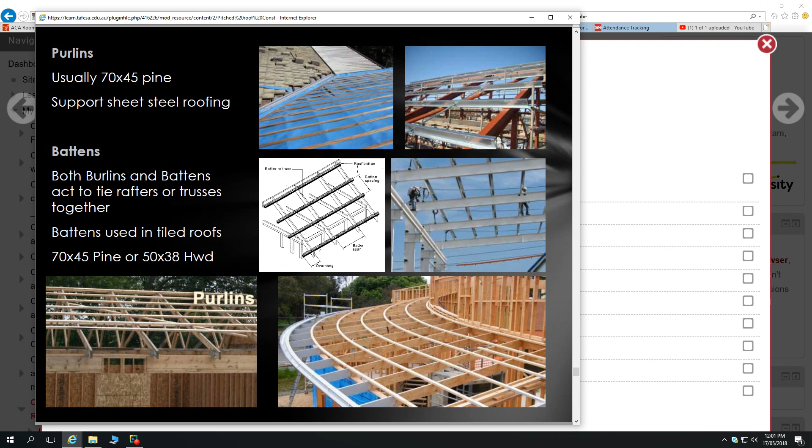And eaves, we've just covered very quickly. That's the overhang of a rafter. With a raked eave scenario like this, we are limited in our overhang.

But if we box our eave like this, so we have our rafter tied back to our wall frame with a soffit bearer, creating this triangulation, it makes that section much stronger. And because it makes that section much stronger, we can have a larger cantilever there. That's one of the main reasons why you typically see a flat edge to your eaves.

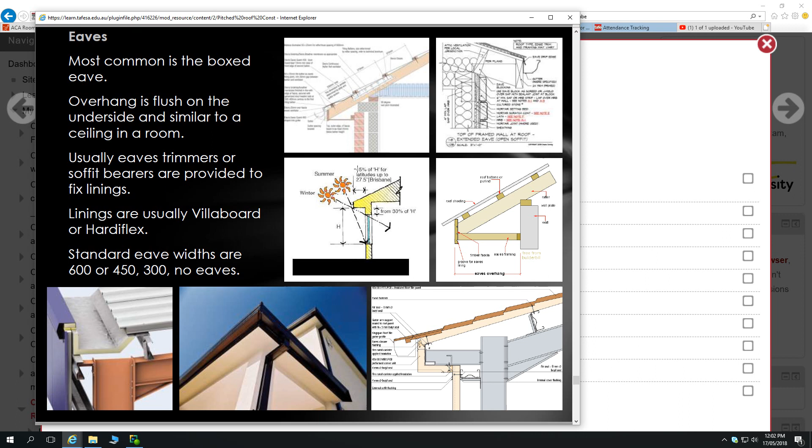You'll see boxed eaves on probably 80% of the buildings that are built. So that's a raking eave, and that's the details around a raked eave. As you can see, it's all hand drawn - this is technology that hasn't changed since Adam was a boy.

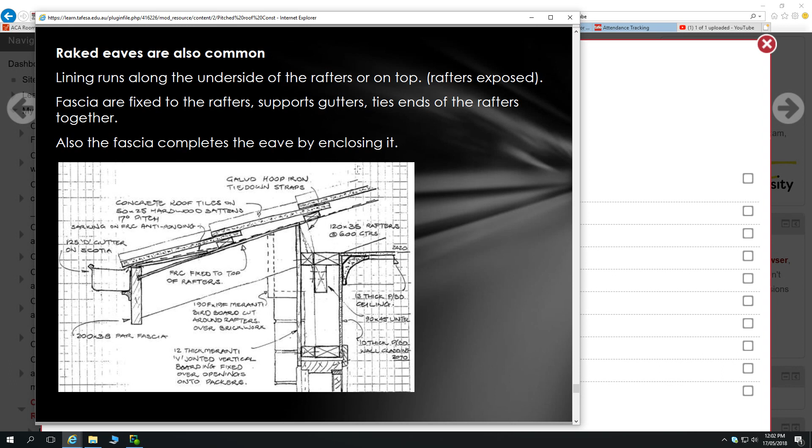Gables and verge overhangs - sorry, I'm going a couple minutes over time here, I'll try to wind it up as soon as possible. But this is what I wanted to show you in regards to those trusses earlier.

So this is not a trussed roof, but those outriggers work exactly the same with a pitched roof as with a trussed roof. This is our end truss here, if that were a trussed roof. That one's going to be slightly shorter than these trusses because we have outriggers that go over the top and fix back to our next truss in, our first truss in. That creates the gable overhang, and that's how we achieve it.

Very simple to remember how large we can make that gable overhang - it's the 1/3, 2/3 rule, and you'll see that in timber framing a lot. The overhang is allowed to be half of the backspan of that piece of timber, so 2/3 has to be backspan, 1/3 can be cantilever.

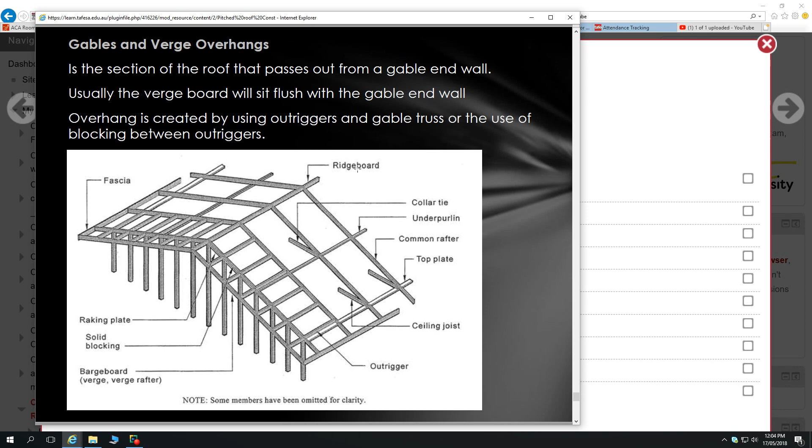So if our rafter spacing there is 600 millimetres, then we can have a 300 millimetre overhang. If it's 1200 millimetres sheet roof, then we can get that up to a 600 millimetre overhang. That's one application of 1/3, 2/3, which you'll see a lot through the timber framing code. And that's it for timber structure.

Essentially what we haven't covered are timber floor systems and timber versus steel wall framing. I'll try to weave that in at some point, but it's getting a little squeezy with what we have to cover and how much time we have. I'll squeeze those in at some point, but they should be very quick because the principles we apply to timber framing are very much the same as with light gauge steel framing. The difference is one has studs or sections made out of steel, one's made out of timber. And the steel frames have to be designed by the people who manufacture the steel, whereas the timber we can design through the timber framing code.